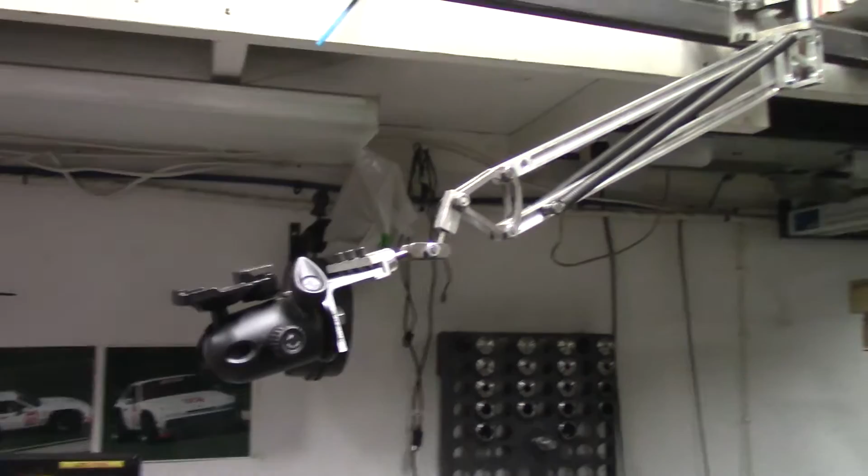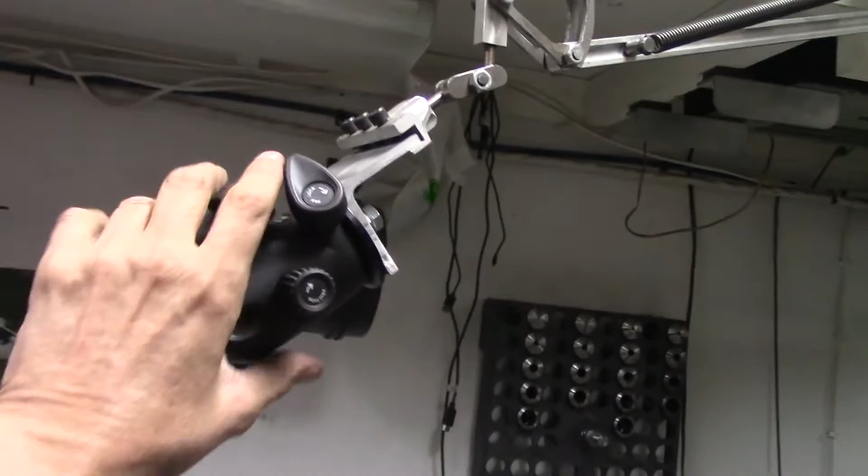So here's the setup I have, so I can film above the lathe. It's just a piece of 1x2 tubing that I had left over from a client job. Pierre had given me this arm, which is great because I can position the camera wherever I want. I can position that wherever I want, plus the head gives me also a lot of adjustability.

So haven't filmed anything yet on the lathe, but this should make things a little more interesting for you guys, better shots than over the shoulder and far away. Okay, so let's go to the work table and we'll go over the drawings.

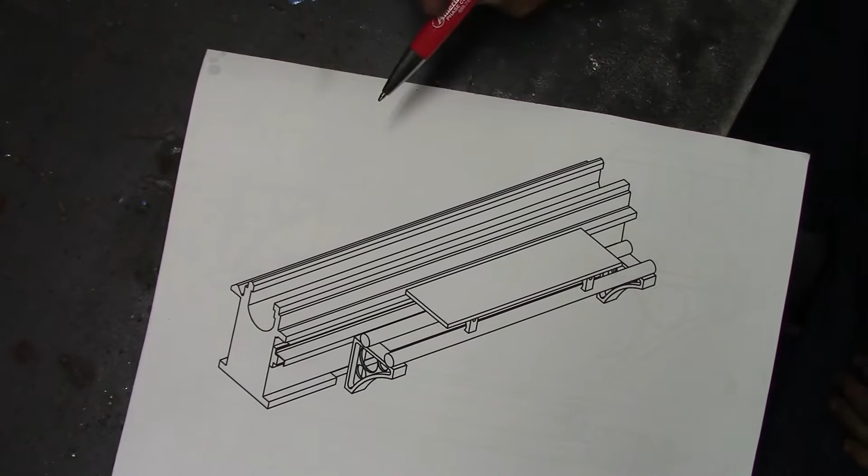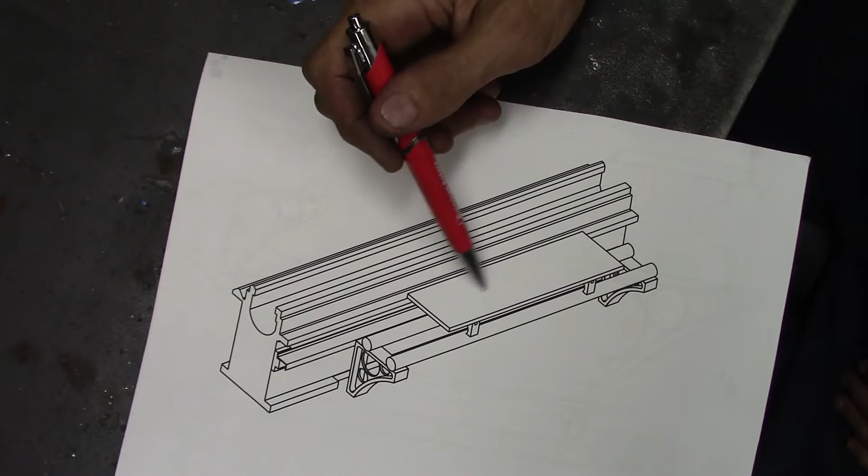Okay, so I've been busy practicing on Fusion 360. Basic principle, I'm going to have brackets. I haven't designed them yet. I need standoffs to clear the carriage and all that overhangs this part of the bed. So I'm going to have a couple of brackets to support two 1.5 inch chrome rods. On that, I'll be able to slide the carrier, I guess, for the taper attachment, which is not drawn in yet.

Here, let me see if I can get this straight for you guys. There you go. Okay, brackets are basically 6 5/8 by close to 6 5/8, whatever. It's a piece of aluminum I have, I'll be showing you guys, which is already roughed out to this shape.

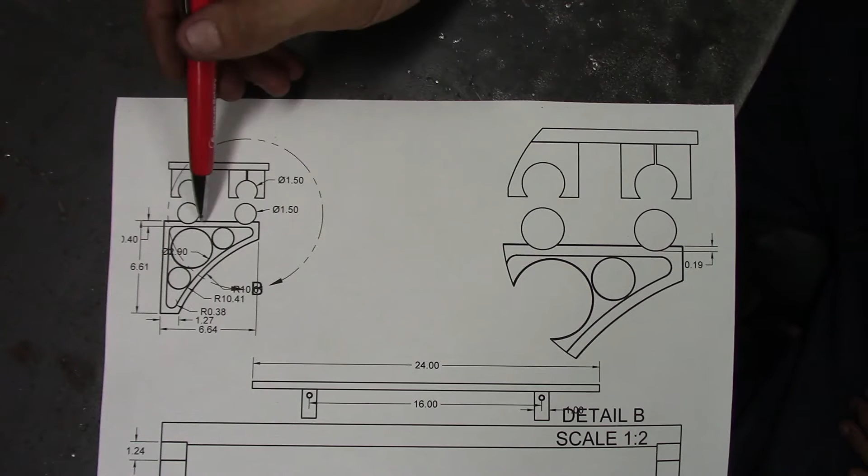This curve is going to cause some challenges, setup wise, when I want to square off this piece and get everything machined. So I have to clamp them down. I got to come up with ways of doing this which are outside the vise. That should be fun. This area here is 3/4 of an inch recessed in. I got about 400 thou on the leftover part.

Okay, forming a perimeter. The center rib is going to be about 1/4 of an inch thick. I just drew in holes for now to lighten it up instead of just a solid rib. I could change designs. There's no real use to that outside of cosmetics, so that I can play around with. This radius here is about 10 inch, 10 3/8, something like that.

The chrome rods, the top of the bracket's going to be notched in. I don't know, can you guys see that? Yeah, about 200 thou, to receive the pair of chrome rods, which are 4 inches center to center. It's going to be bolted in through the bottom.

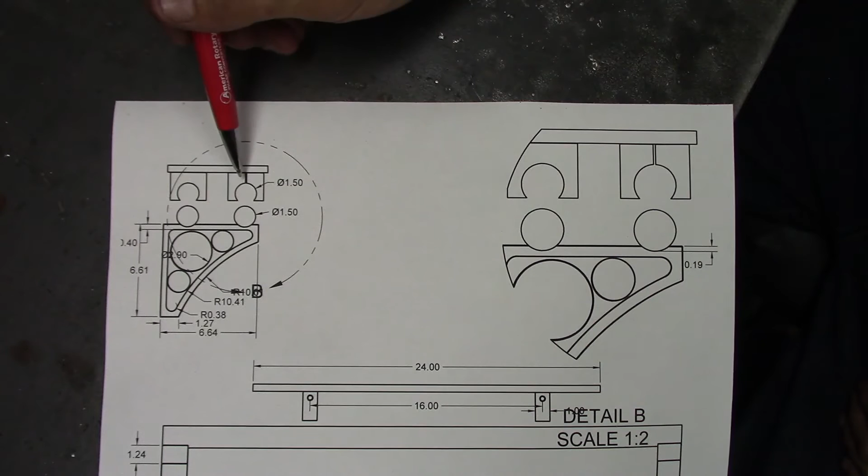Alright, for the carrier, I'm going to have a pair of pinch blocks, about 16 inches apart, and just a solid one as a follower, same diameter or within a thou, just to give it a slip fit. Oop, okay, sorry. Overall carrier is going to be about 2 feet long. The rods are going to be 3 feet, and the brackets are going to be about 16 inches on center.

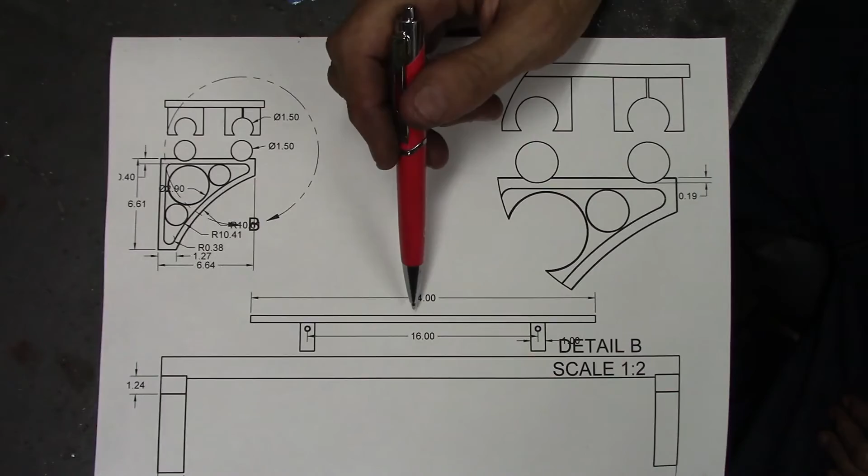The only purpose to this is that I can move the entire taper setup up and down the 3 foot length, so no matter where I'm working, I can use my taper attachment. So that's pretty much it at this point. I'll show you the little chunk of aluminum.

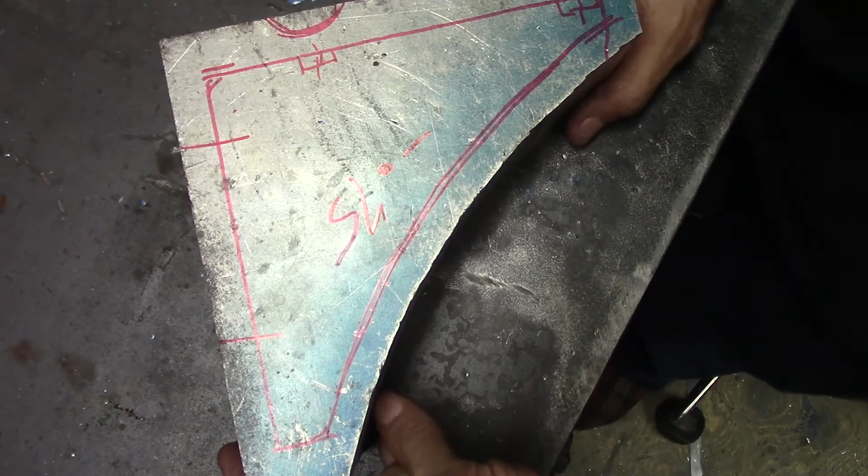This is a cutoff I got from my neighbor, actually. So this radius has already been machined out. It's going to pose some challenges when it comes to machining this down, squaring these off and all that. I'm probably going to have to use angle plates. I got no real way to hold it in the vise, so it'll be some fun stuff. So hold on.

Okay, so just a quickie for today. That's where we're heading with the taper attachment, and well, should be interesting. I think I'm on the right track. I've had some great responses on my last video, the announcement of it.